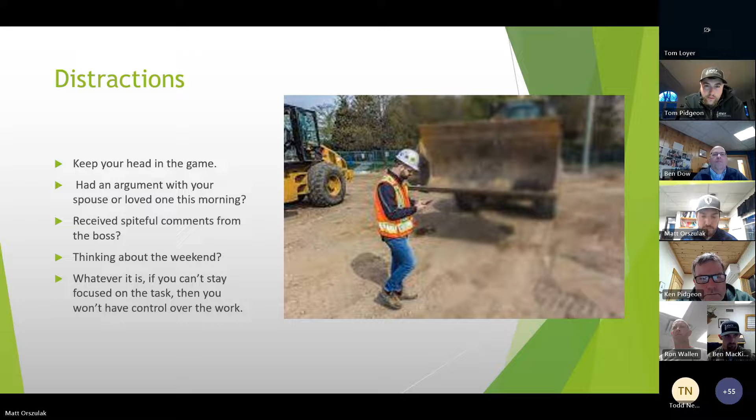Exhaustion, hungover. Avoid excessive indulgences before the workday. Know what you have to do the next day, and make sure you're getting enough sleep. You may have a long work day ahead of you, you may have a long commute. You get home, you eat, and go to bed.

And if you're tired, make sure you're taking breaks. If you're doing something monotonous, repetitive, make sure you're taking breaks and getting your mind thinking about something else once in a while.

Overconfidence, arrogance has a lot of overlap with complacency, but this is more of a conscious, I don't need to do this, I've done things like this 100 times, like working on equipment without turning it off or locking it out. Nothing's gonna happen. You get so good at a dangerous task that it no longer feels unsafe to you. You kind of get numb to the hazards.

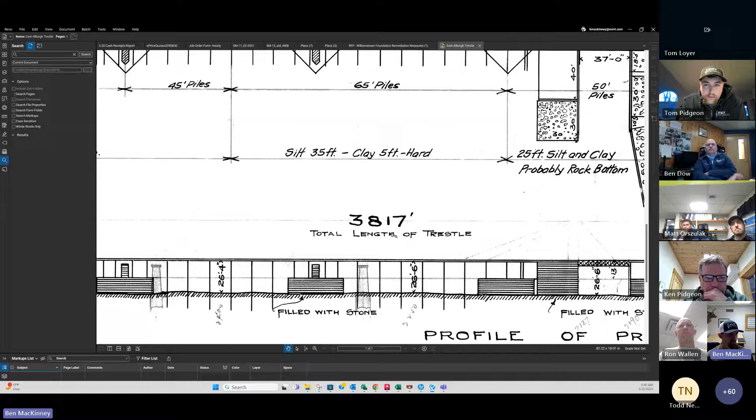ECI is contracted with Genesee and Wyoming, parent company of the New England Central, to perform various structural repairs to the East Alburgh Trestle. Built in 1911, this wooden bridge is approximately 3,500 feet in length and crosses Lake Champlain just south of Missisquoi Bay. I think that's the first lie - it's more like 3,700. It says 3,817 here.

Here's the original plan from the original construction, and you can see some markups for ideas somebody must have had over the years - like they've got all these wooden cribs and piers that don't actually exist. But it would have been a neat, good idea, right? We'll talk about that - but you can see how long the bridge is here. Crazy.

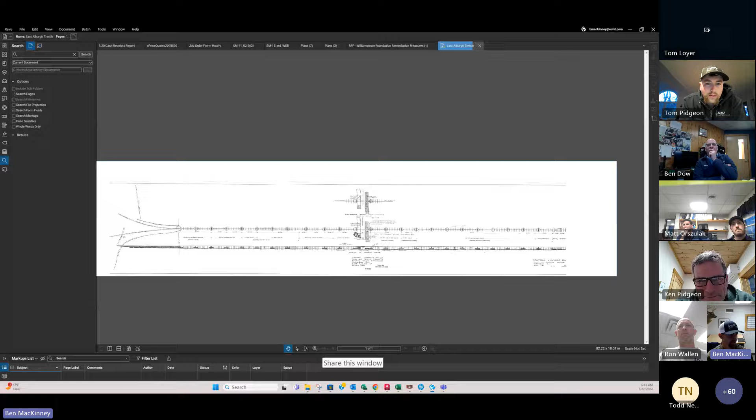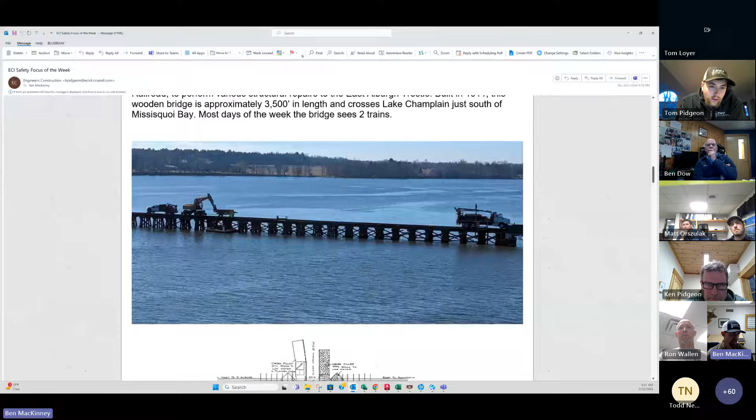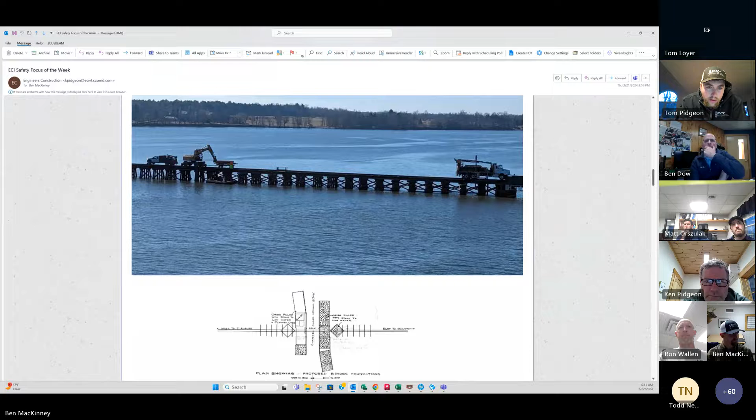Most days the bridge sees two trains. CN comes down and drops cars or picks up cars in St. Albans, then heads right back north into Canada. So you can see the trestle here, we got a couple crews out there on that day. This is a picture taken from the highway bridge, the 10-year-old or so Missisquoi Bay Bridge.

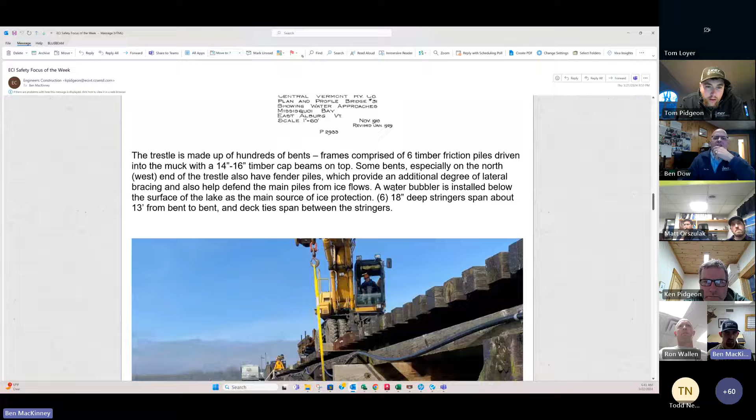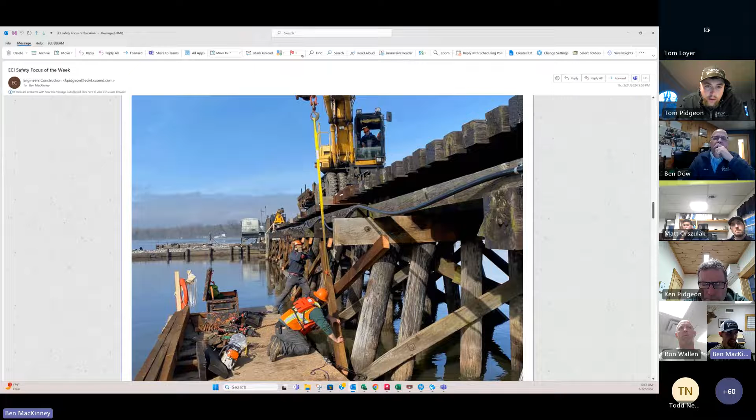The trestle is made up of hundreds of bents, frames comprised of 6 timber friction piles driven into the muck with 14 to 16-inch timber cap beams on top. You can see typical trestle construction with these fender piles, the outer two on each side of which are battered. That print we showed before shows the original pile lengths, ranging from 45 feet to 65 feet. The plan shows some inferred rock, but I think these are primarily friction piles driven into the muck, not end bearing.

Some bents, especially on the north, have additional fender piles outside the 6, which provide an additional degree of lateral bracing and some protection from the ice. The main protection from the ice now is a water bubbler that's been there longer than I've been around - just a simple pipe with a bunch of holes in it that makes bubbles so ice doesn't form. It's simple but effective, as long as the air stays moving.

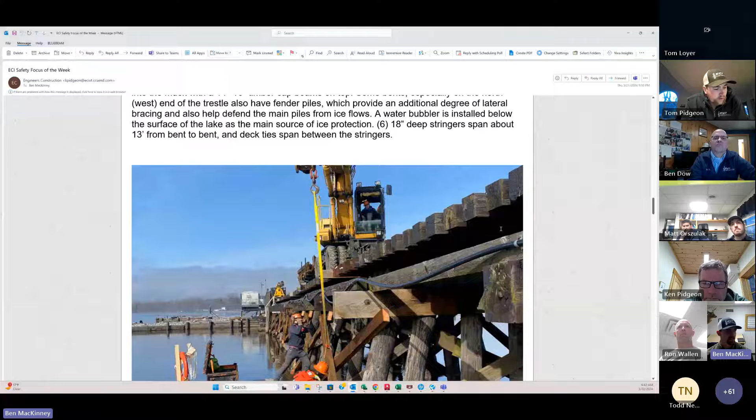More on the typical construction: you've got your 6 piles, a cap, and 6 18-inch deep stringers that span about 13 feet from bent to bent. Those stringers are spanned by the bridge ties. That's not a stringer you see here in the picture - that's a different piece of wood.

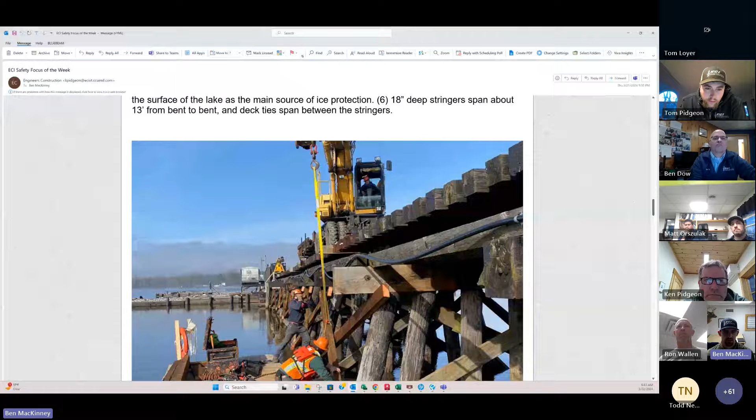Ron, what is that pipe there - that's not a water bubbler header, is it? That's part of the main supply to the bubblers, and there's drops that go down from that to actually feed the bubbler that's in the lake. Got it - and they take that out every year, do they? Nope, that all stays in there. Okay, cool.

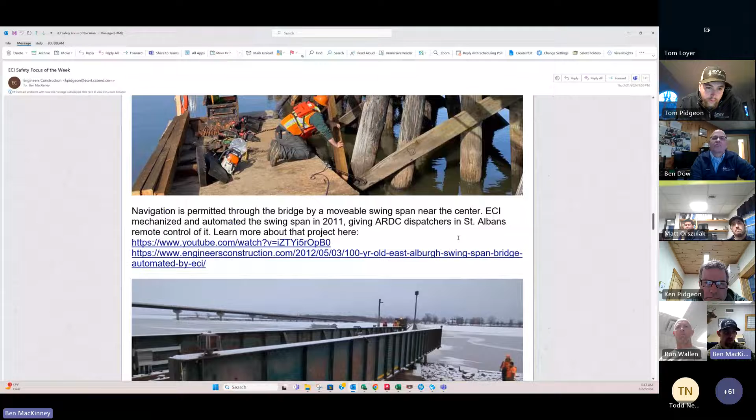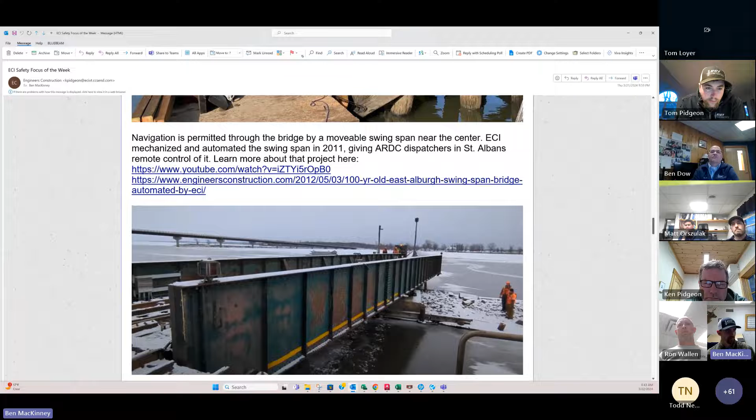Navigation is permitted through this bridge by a movable swing span near the center. So you've got this big timber bridge, and then you've got a couple of cribs or islands with piles, wood lagging, and stone fill. One at the center of this 2-span movable bridge, which is at the pivot point, a center bearing, so it can move. And then the other behind me in this picture, which has got a lot of other things on it. It's pretty neat.

We automated this about 13 years ago. This used to be manually swung. So between extracting the wedge bearings and turning the bridge, that was all done with a super deep capstan style wrench and deep gear reduction with 2 different gearboxes and linkage. And we did a ton of work that we won't get into here to make that controlled by ARDC in St. Albans.

So the bridge can be opened for boats and then closed for trains in the summer months. If you want to learn more about that, there was a link to the original article and a YouTube video in the email. Being a very old and long wooden bridge subject to high train loading and all types of weather, the NECR is forced to spend hundreds of thousands of dollars each year in maintenance.

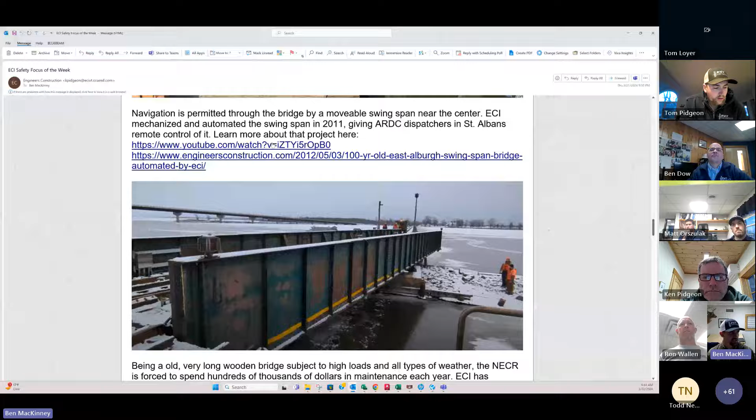ECI over the years has performed much of this, or maybe even the majority of this. Typical maintenance includes replacement of caps, stringers, bridge ties, and when individual piles rot out, we have to replace those too.

That could be done by pile posting, cutting the original pile below the rot line and replacing just that pile. But typically we'll do a whole bent, what's called reframing a bent, or doing a bent cut down, where we'll cut all the piles down in a bent, put in a sill, new piles above it, typically a new cap at that point. Of course, instead of having this big cantilever stiff pile that's got some lateral and longitudinal resistance to load, now all of a sudden you have a hinge, because you've cut it off below the rot.

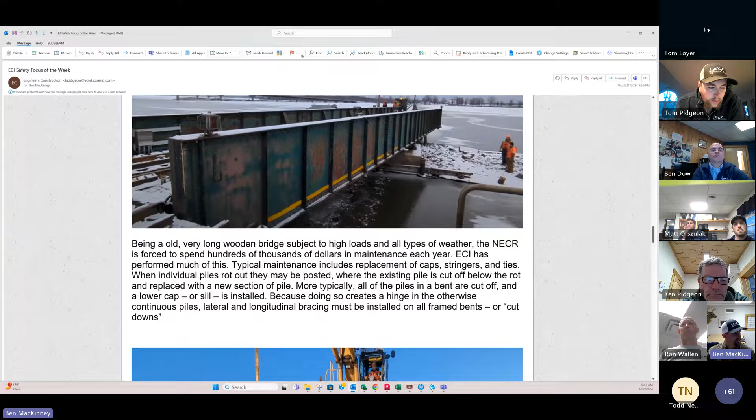So when we do that, we are also required to put lateral and longitudinal bracing to stiffen that up. Our current contract includes 10 of those cut downs, 10 of those full big cut downs, which are quite a bit of work. You're kind of forced to do them in a day based on the train schedule, but it's a big day.

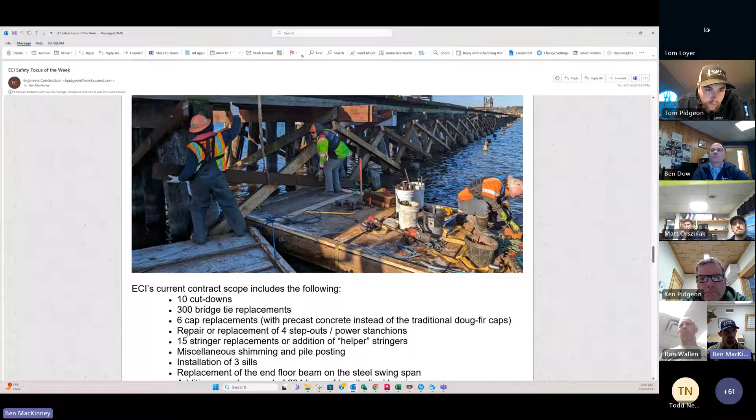We also have 300 ties this year, 6 caps, repair and replacement of 4 step outs or power stanchions. You can see in the background that little place that looks like someone could step onto that - that's a step out. On the north side of the bridge, or Railroad North, Cardinal West end of the bridge, those also carry a big power cable, quite a bit of extra load to get power to that house to move the bridge.

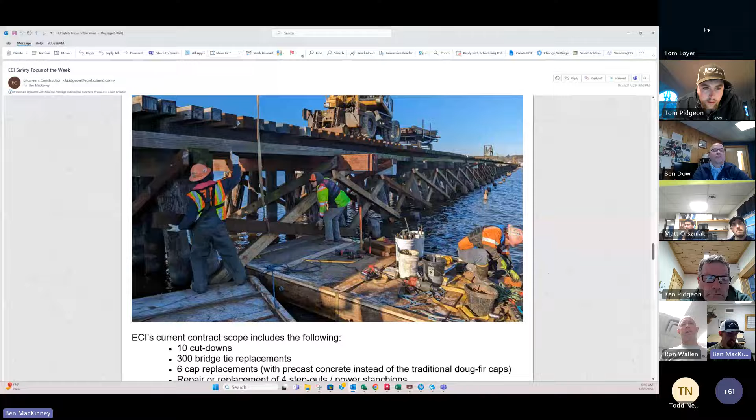15 stringer repairs or replacements, a bunch of shimming and pile posting, 3 sills, the replacement of the steel end floor beam on the swing span itself. And then the biggest single piece of the scope was 294 bays of longitudinal bracing.

So I mentioned before, when you do a cut down, you're required to brace it to stiffen things up. The railroads had a lot of issues with this bridge over the years when it gets hot - even though it's not welded, it's jointed rail, having that rail grow over 3,000 feet of rail. Obviously it gets hot and it grows a lot. It's proportional to the length, and having it grow pushes these timber bents, which typically will show itself in the fact that it'll pinch the swing span, which is an issue, because if it pinches and they can't open it, then boats can't get through. And even worse, if it pinches when the swing span's open, then they can't get the bridge closed.

So the railroad's trying something new this year, putting all this longitudinal bracing in, even on frames and bents that haven't been cut down, to try to stiffen things up. They've tried other things over the years that we've been involved with, like the addition of expansion rails.

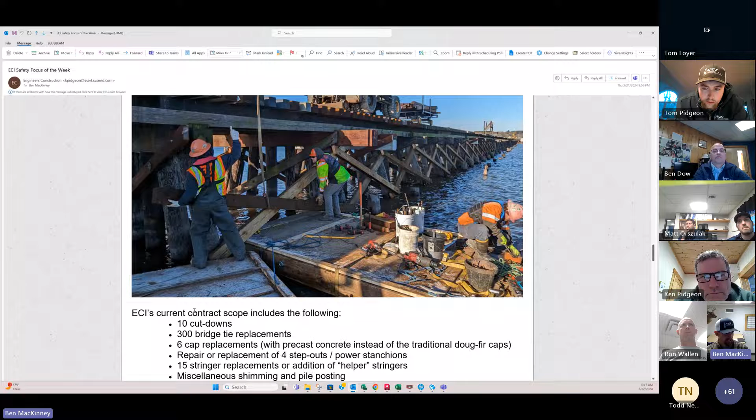So just looking at some other work that we did, you can see new bridge ties here underneath the 210. You can see a brand new cap there. Then you can see a concrete precast cap in the background, a couple. They're a little bit shallower, so they have a top piece to make up the depth. That's something that was new to us this year, putting the precast caps in. It seems to be a good product, certainly heavier, but the big issue they have - all this stuff is Doug fir with copper naphthenate preservative.

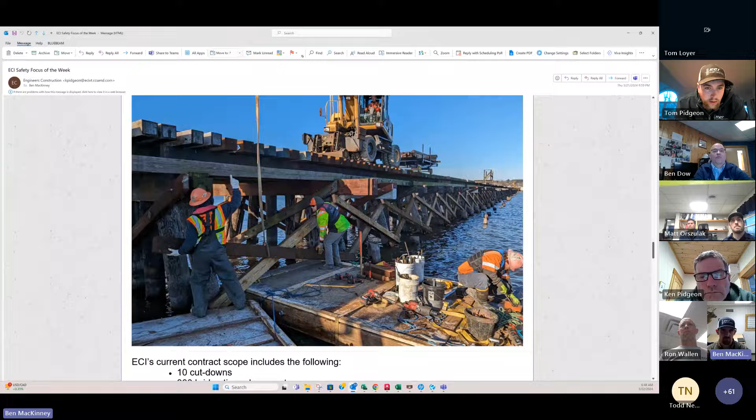The biggest issue they have with the caps is crushing. They'll rot and crush, so that should obviously be helped a lot by the precast.

Who made the precast ones, Ben? I don't know, all the material NECR has been buying for their own projects for the most part. Ron, did they have a stamp or a name on the precast? Yeah, I think it's American Concrete. Never heard of them. They're neat though. I mean, they've got all these PVC conduits in them for your pins and bolts, so no drilling.

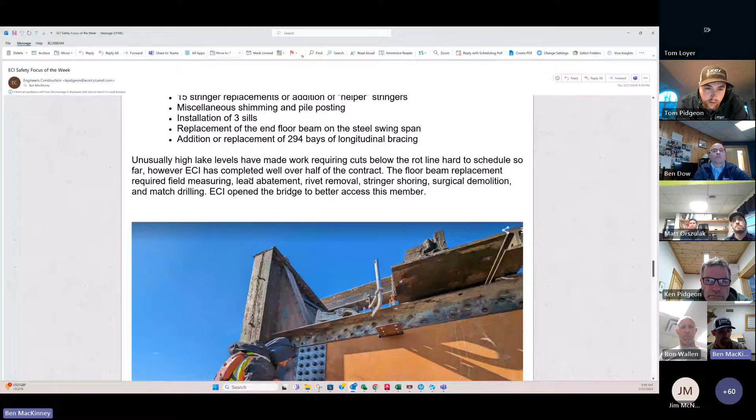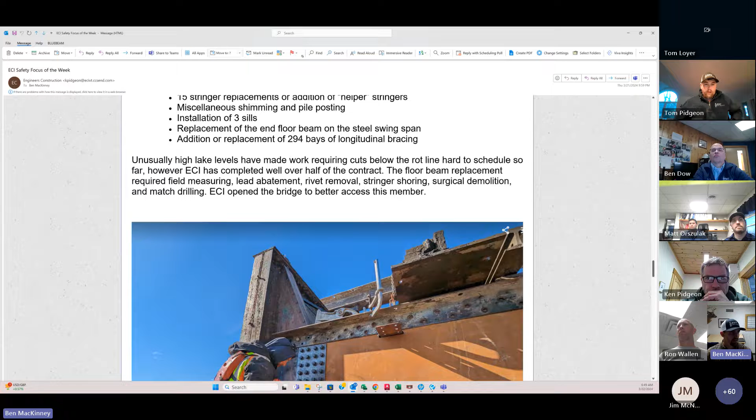Unusually high lake levels this year have made all the lower work that requires cuts below the rot line, or even bracing where you want to get nice and low for good strength of figure, really hard to schedule. From July 10th on, that lake's been up. But we've still got the majority of the work done, over half the contract. We got the floor beam done, and a lot of the low work done before the lake started coming up a couple weeks ago.

That floor beam on the swing span was quite a little job. It appears to have been damaged, maybe in previous times when the wedge bearings weren't adjusted right, and the train coming onto that bridge probably put undue stress on it when it hit that floor beam, because it had some pretty good tears where the stringers framed into the web.

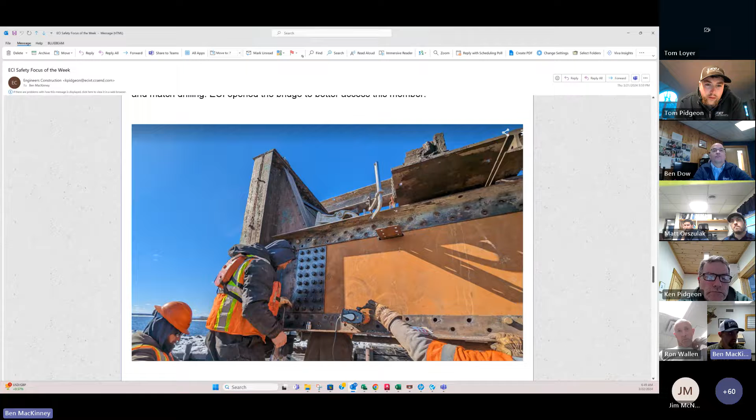So we replaced the floor beam web, which required field measuring, lead abatement, rivet removal, stringer shoring, some surgical demolition, and a lot of match drilling, bolting and torquing.

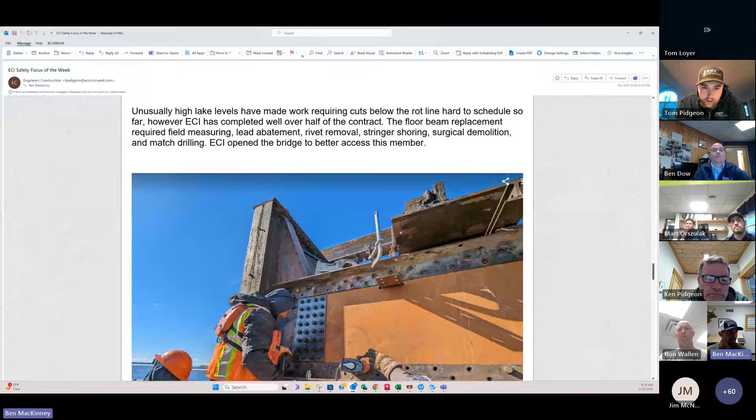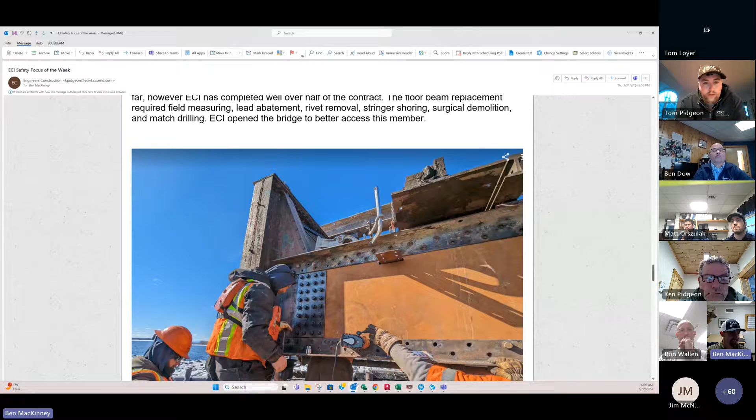One nice thing about a movable bridge is that, unlike most end floor beams where you're kind of in a tight spot, we could just open this up and have room to access it.

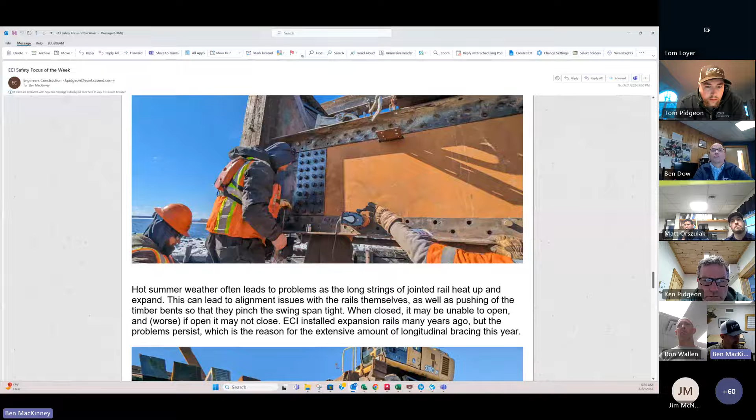Of course, like any bridge work and railroad work, time is of the essence with trains coming, but you guys did a good job. You can see someone here running a mag drill with two fingers while working on the other side of the beam. That looks like somebody that's done some drilling before.

We went over most of this verbiage, but here's another picture of the guys doing some longitudinal bracing.

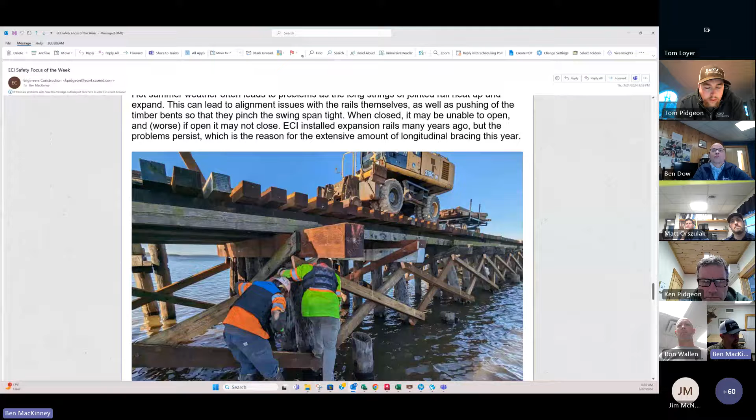So for now, with water levels back up and most of our remaining work being down low, cut downs, sills below the rot line, we'll demob for now. But we'll come back maybe June or July when the lake's back down to 96, 95.5, and we'll wrap up the rest. Here's a picture of part of the team.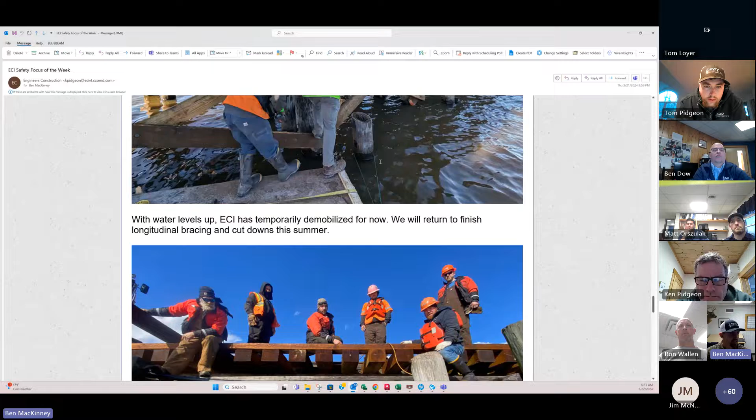We were running two crews. We had like 11, 12 guys up there in late winter, but here's a few of them. That's it, cool picture.

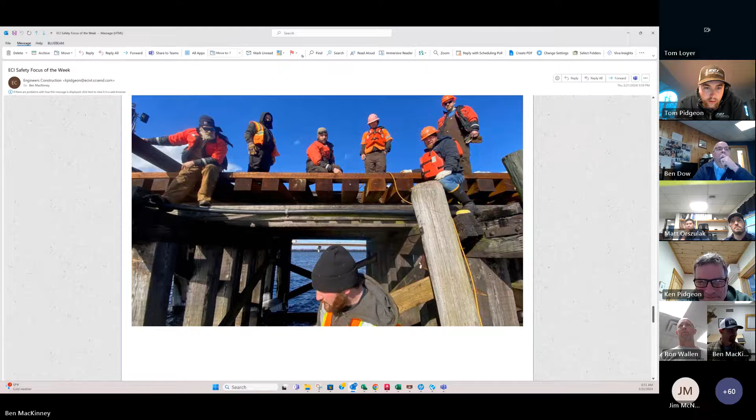If you have a chance, check out that YouTube video. That was a pretty cool project.

It gives you a sense of the precision needed for the bridge to go right into its correct location at the end of these long stretches of kind of a floating bridge. And it's super flexible. You've got this thing that needs to be pretty dialed in to work, and it's connected to thousands of feet of relatively sloppy, flexible construction, like a roller coaster.

If they were to do it again, the center pier would be the same, but they would have rigid abutments at each end of the swing span that are pile supported and aren't going to move. But they don't have that at all.

I think at the expansion joints there's a pair, so two pair, and each pair can travel up to 30 inches. Is that correct on the expansion rails? Yeah, that's right. That gives you a sense of how much movement can happen from thermal expansion and contraction.